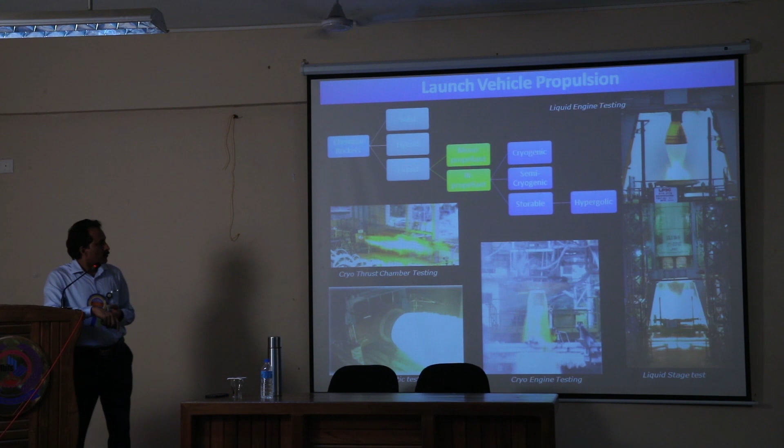So our core area is propulsion. Propulsion is fundamental to a rocket, is it not? If you have to move forward, you have to propel - you are all propelling yourself. So if I have to gain velocity and go to orbit, overcoming the acceleration of the earth, you need propulsion. Propulsion is a technology by which you generate so much energy.

So the fuel used in a rocket is full of energy, and when you burn it, very high temperatures result, something like 2000 to 3000 degrees centigrade. When you expel them at very high velocity, typically Mach 5 and above - 5 times the speed of sound - the rocket gains velocity.

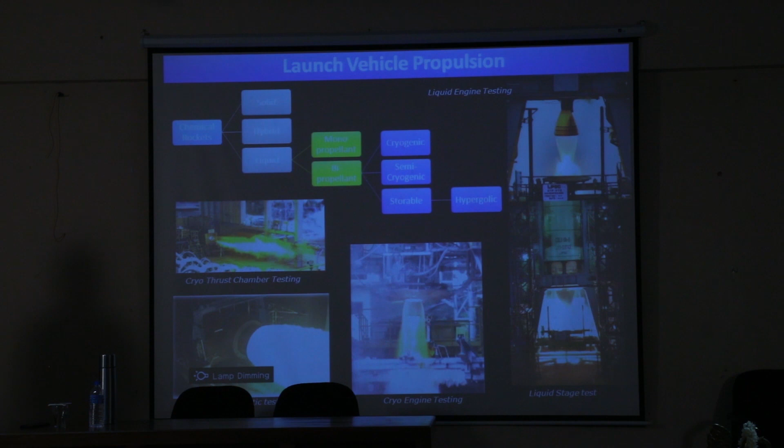And by eating its own mass, the rocket moves forward. So this is a technology. So we have various knowledge like solids. If you look at solid rockets, there are plenty of solid rockets. This is the biggest one we have made, 200 tons of propellant. The grey color, what you see here is a propellant, simply cast into it, 1, 2, 3 pieces, each weighing 100 tons. Even to lift it itself is a massive effort.

And we have the rocket of PSLV, which is 139 tons. We have strap-ons of PSLV, which is 10 tons. This is 9 tons. Like that we have a small 8 gram rocket. So this is not the full spectrum. There are many of these types which we are designing using different propellants and different sizes for different applications.

So this was used in deorbiting of the moon impact probe, which went to the moon. To come back to the moon and impact, this small rocket was used. And there are plenty of other rockets which we are designing. So if you want to design a solid based rocket, it is child's play. In VSSC it will be designed in just 1 month, flat.

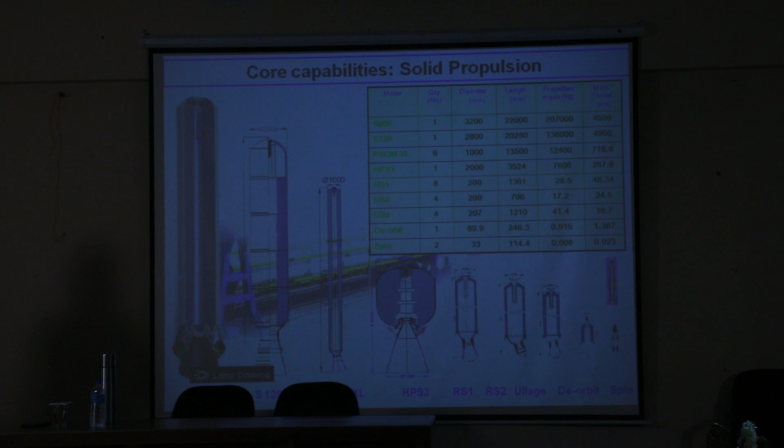But you think that it is so simple today, but I can tell you a story. In the 1960s when we were designing, any motor you test, it used to explode. Kalam and all his friends were designing rockets and motors. Every day they would test, it would explode. So the knowledge that you have today to design in 1 month came out of that experience of explosions and failures, and we understood how it works. So today we know how to design a solid motor just like that. The technology, the software, the processes, the methods are all well developed.

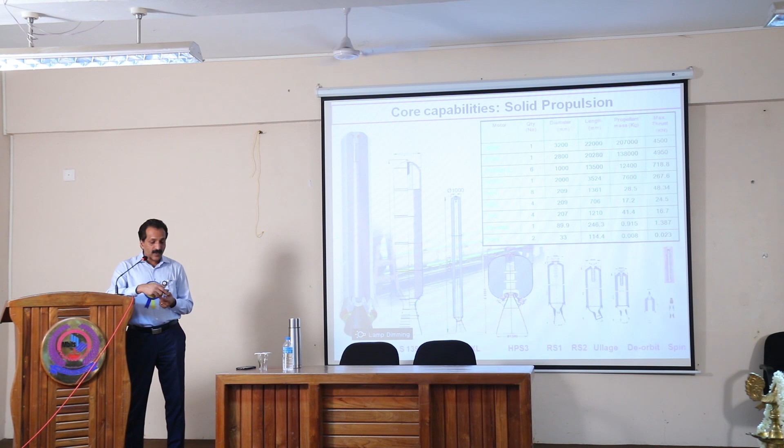So you know 1 megawatt of power? Have you seen a diesel generator which is fitted in the generating stations having 1 megawatt of power? How big it is? It will occupy at least this much size of this podium. That is called a 1 megawatt diesel generator.

And this engine generates 5 megawatts of power in rotating speed because it rotates at 40,000 RPM and operates at 1000 degrees centigrade using gas and pumps oxygen and hydrogen in so fast. And it generates 5 megawatts of power and its mass is only 500 kilograms. So you can understand the power density inside that engine. So that is the complexity of a cryogenic engine.

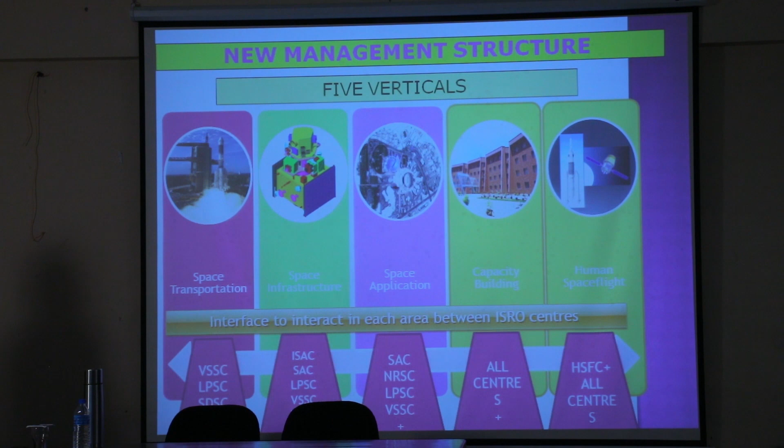Now let me go to how we manage all this. We have a system called verticals. Those who are in the business field would have heard about verticals. So what are your verticals? What do you understand by vertical? It is your domain; you want to divide the total activity into different domains. So we have also divided our domains into various areas.

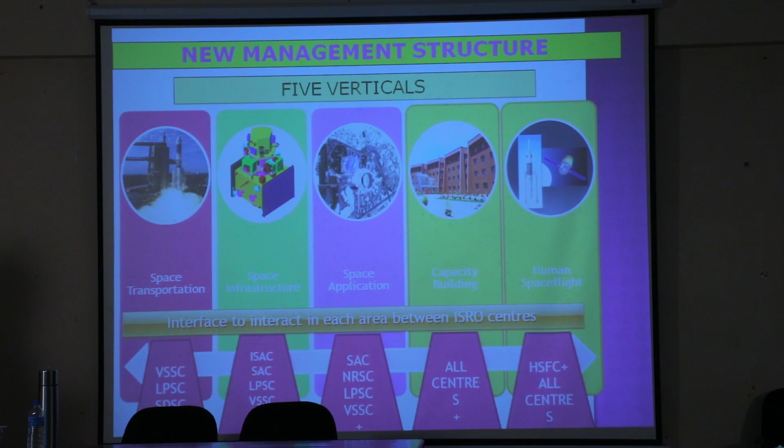One of the areas is called space transportation. Then space infrastructure, that includes satellites and their maintenance and operations. Space application, how to use a satellite to produce certain output. Then capacity building, how to build our institution, how to build capacity to develop new things, etc. And human space flight. So we have different centers.

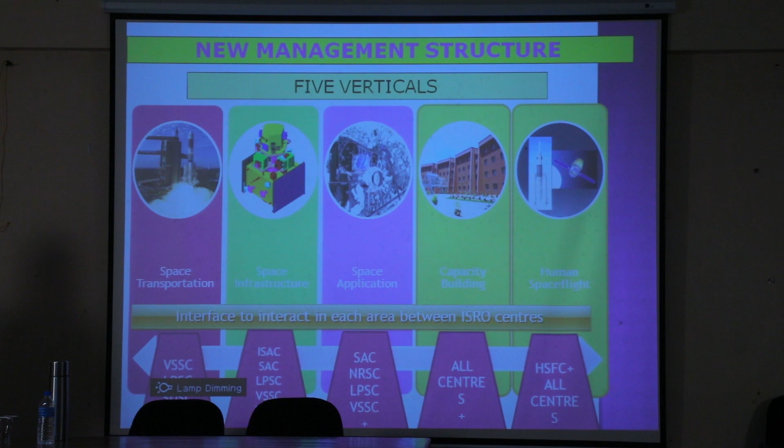For example, space transportation is handled by my center VSSC, LPSC Liquid Propulsion Center, Satish Dhawan Space Center, and ISRO Propulsion Complex. All these 4 centers together manage the space transportation vertical. And I am the managing committee chairman of this whole vertical. So we have a project management council chairman for each vertical. We report to chairman ISRO.

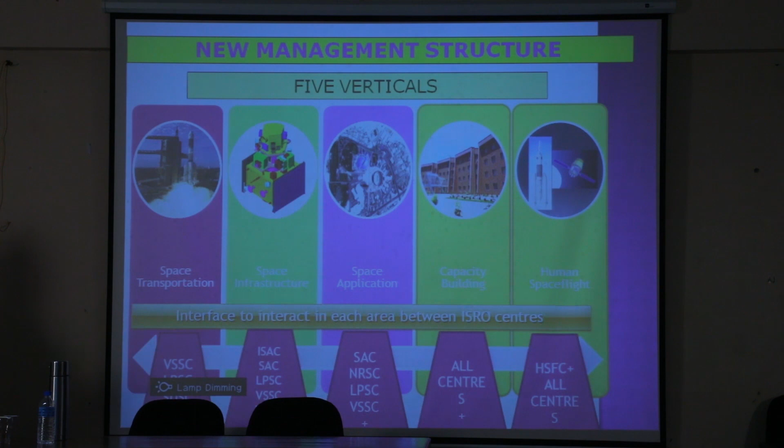So we handle the whole plan of how this has to be done in ISRO. So we created a management structure, and that's how we handle this today. And downline there are so many other structures that we created. There are almost 18,000 people in this organization. If you have to really produce some output, we need to create an organizational structure.

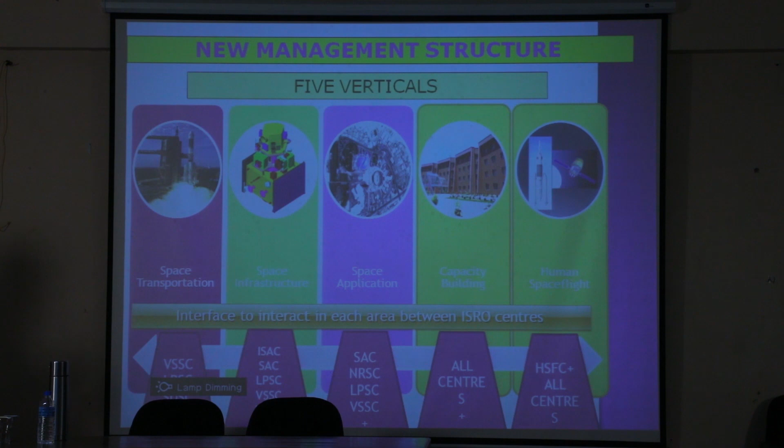So it is important. This is a new concept that we introduced, verticals. But the most important part is projects. You heard of Abdul Kalam, who was the first project director of SLV3 and successfully made it. So this shows the project director of SLV3. He was the project director. Under him there was a deputy project director, and under him there were project engineers, and each of them did the developmental task. So we create a structure in the organization.

Suppose we have to make a rocket, we immediately go and make a project team. So you are the leader, and he is the deputy leader, and these are the sub leaders, and each one is responsible for this. If you have to conduct a conference here, how will you conduct a conference? Immediately you will form a committee to conduct a conference, and you will form a local organizing committee chairman, and under him there will be a chairman for catering, another for transportation, another for technical program, right?

So this is essential. If you are to organize today, if you are to run a system, you need to first delineate the responsibilities, and there must be somebody who is actually coordinating and seeing where the weakness is, put the people appropriately, and then manage it. It is the essential part of any management process. It cannot be just like in a chaotic environment, nothing will come out. So in an organized way, you have to find somebody who is capable of managing each of these, somebody who is good in food arrangement. A foodie fellow will not be good in transport arrangement. So you have to identify the right person to do the right job.

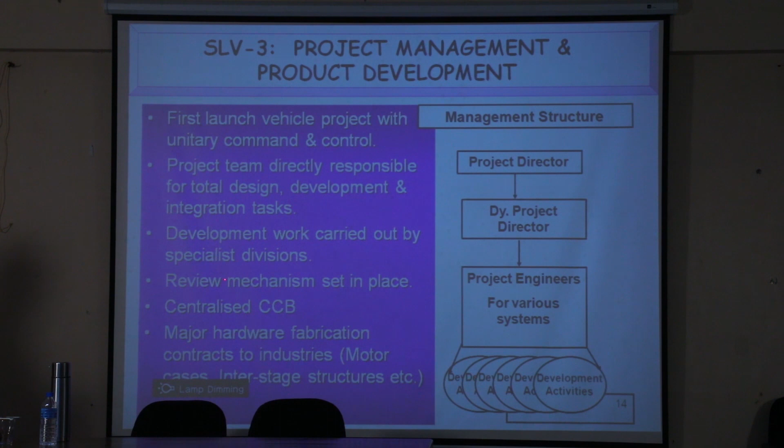Engineers' responsibility is equally like this. You will ultimately end up managing a lot of things in your career. So you need to understand how to manage people, how to manage situations, how to manage resources, how to manage time. This is your essential work. So what I am telling here is that we created at that time a project director who was responsible for the first launch vehicle, and all of these people were reporting to him, and Kalam is the person who actually created a concept called review.

In ISRO, before that there was nothing called review. Somebody will design, he will make it, fabricate it, test it and fail. Now, we said that it cannot be done. You are using public money, so whatever you design, you bring it to us. A team will sit, will listen to him, whether his approach is correct, whether his design can be given a go ahead. So we started creating what is called the peer review principle.

Suppose a work done by one of you, you allow that to be reviewed by somebody else of your level, not your teachers. You know what will happen? They will ask you questions. And when they ask you questions, it will make you think. And when it makes you think, you will understand your fallacies, and you can correct and improve. So this is a simple principle: when you subject yourself to review, you are actually improving yourself, not being questioned.

So this is a culture of ISRO today. Whatever you do, you subject it to review. You open it to people, telling them I am doing this, I am doing this. Okay, you give your comments, and people give comments, and based on the comments you become stronger, you become better, and it is most likely to succeed when generally there is an agreement that what you are doing is right. Everybody need not agree, somebody will be differing, but then the project leader will come and say, I agree with the general view, go ahead, right?

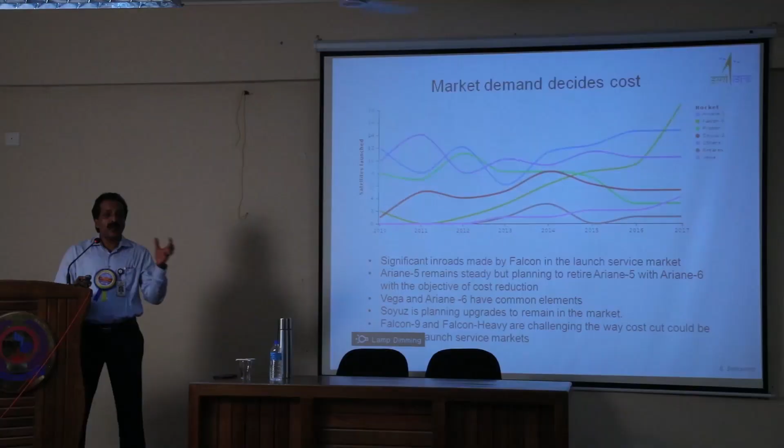He has dedicated almost 30% of his wealth to building rockets, and he is launching one of the biggest rockets. So Elon Musk is a person who is building a rocket to go to Mars using the money he made using PayPal. PayPal was a financial transaction site which he designed and he sold off. Now he is fully into aerospace.

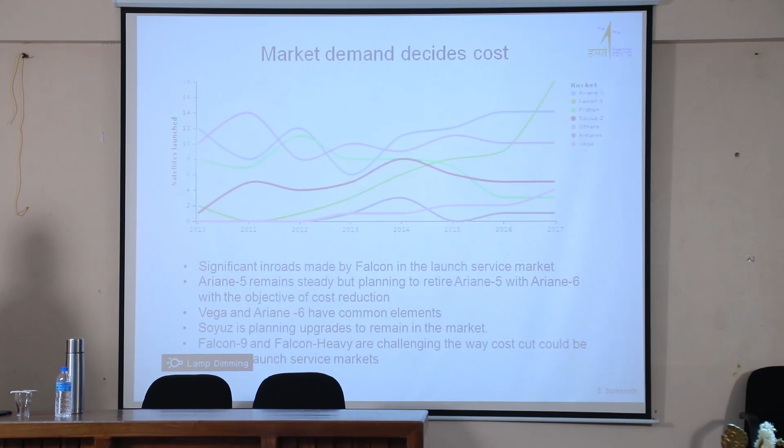So now it shows Falcon is making one of the biggest strides in the history of rocketry in private enterprise. Today in America, the entire rocket business is handled not by NASA. NASA is dead. The entire space in the US is handled by two big companies called SpaceX and Blue Origin. They are all full of retired NASA people, but they are making the change and deciding where America should go in the future.

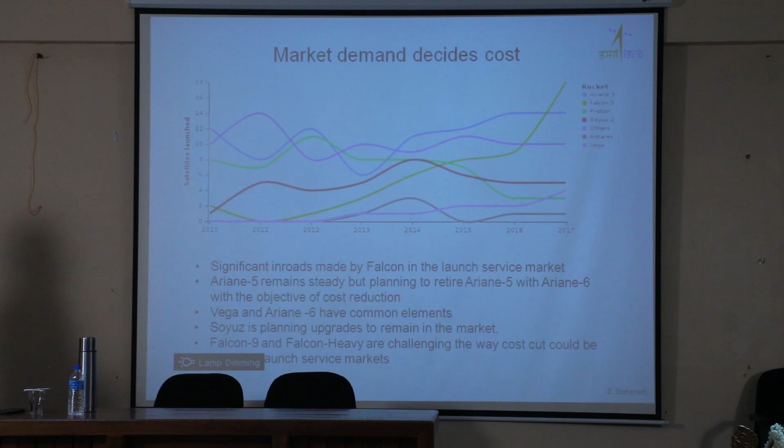And many others like Soyuz, Ariane, etc., they don't know what to do today because the private players are changing the way the market works. So this is something which I want to tell you. So those who are interested, please read.

Cost is an important thing for everything. So the cost of launching is typically 50 to 70% of any mission. Mission means why I am launching a satellite. I have to do communication. I want to do television broadcasting. For that I am making a satellite and I am going to launch. So I should get revenue from the television broadcasting.

So every channel will give me 5 crore per year and I am selling it to some 100 TV channels. So I get 500 crore per year for the next 10 years. So I make 5,000 crores. I have to invest and make a satellite with 1,000 crores, another 1,000 crores for launch. So I have 3,000 crores balance in my pocket. Good economics, right?

So if I have to do all this, I must compute my investment and return on investment, and what can happen at launch, the insurance. Suppose the launch fails, 1,000 crore is gone. So how do you invest, insure? All this becomes important issues in space. You are not simply launching rockets, you are looking at various aspects of cost. So you should understand what things are involved, how you really cost the launch, the satellite, and the transponder.

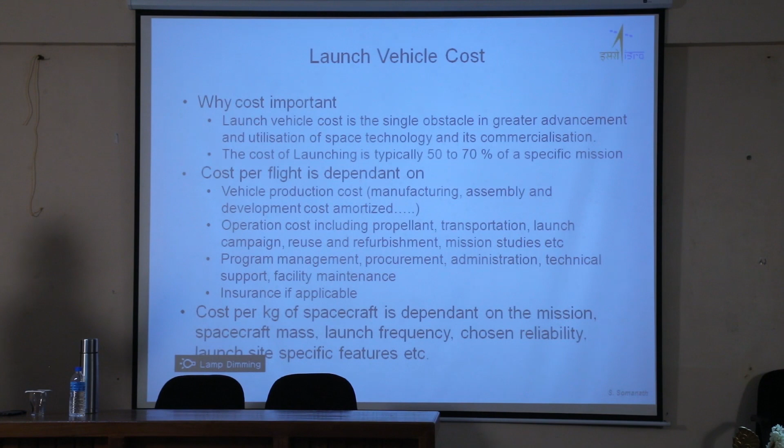Suppose Asianet wants to uplink a news program all across the world. Any idea how much money he spends? You engineers need to know, electronics people. A television channel starting in Cochin tomorrow, to start a channel, uplink its program and make it available to all India, all Kerala viewers, how much money do I need to spend? Very difficult question, no? But then find out some way.

You are all going to become engineers, you are going to manage such organizations tomorrow. You are going to understand how it is all managed. So you should understand there is a process of leasing transponders, how much money you have to pay yearly for transponder leasing. All these are technologies.

Suppose you want to run a BSNL telephone network, and they are giving a data rate of 1 GB per month. What is involved in this? How is Jio able to do it at low cost compared to BSNL? Anybody thought about it? You are using your mobile phones just like that, no, Jio? Please ask this question. Okay, so here again the same question comes, how launch cost can be reduced. So let me describe quickly some of the important elements.

So every launch cost is a function of various aspects. One is its mass, orbit, etc. And customers are important. For example, if ISRO goes to Arianespace to launch, Ariane will give ISRO a special price. And it will not give that price to Pakistan, or it may not give that price to China. Because we are a loyal customer, we have been coming regularly for launch, so they will give a preferred cost to us. And there are special requests, market pressures. Suppose their launches are coming down, they may give low cost to us.

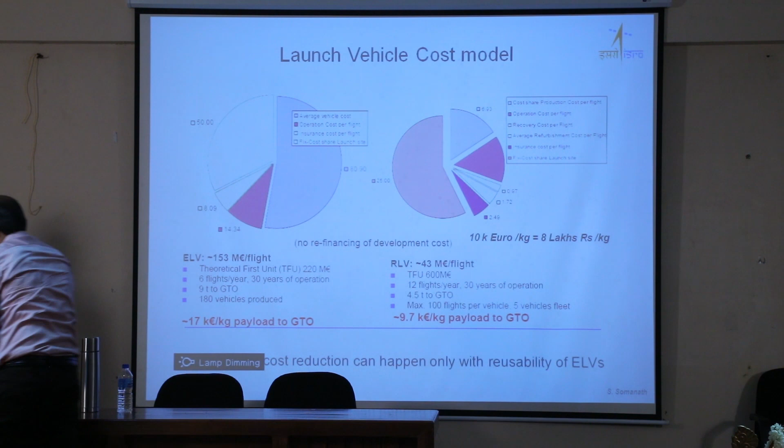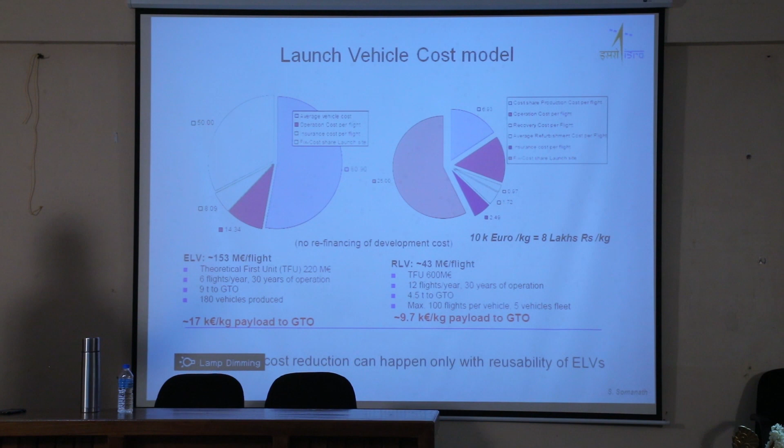So you have to compute what is the density of the aluminium, find out the cost of aluminium per kg, and if you go and ask in a shop to buy that much aluminium, nobody will give you. They will give a little bigger. So you have to buy. So what is the allowance that you will give? What is the machining cost per hour in a milling machine? How much is the machining cost per hour in a turning lathe? What is the cost per centimeter square of anodizing? What is the drilling cost per hole? Any idea you have?

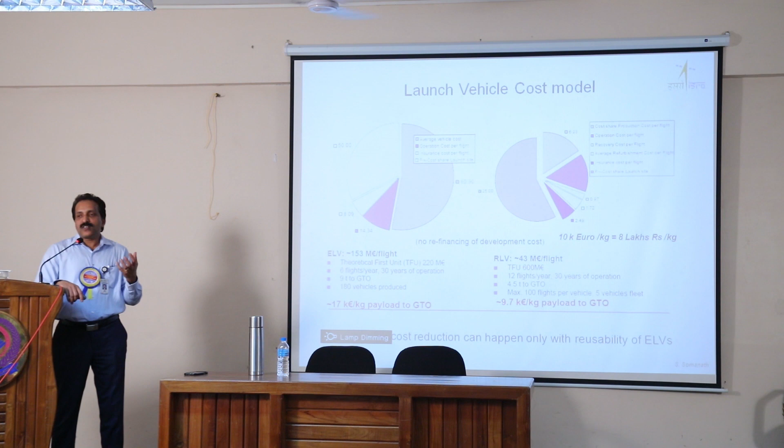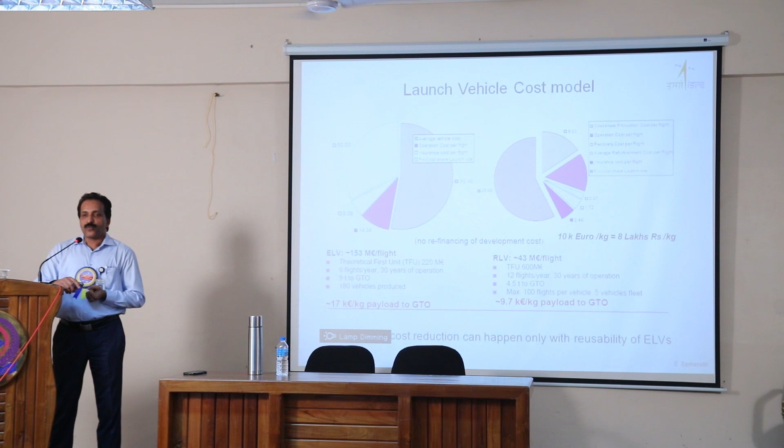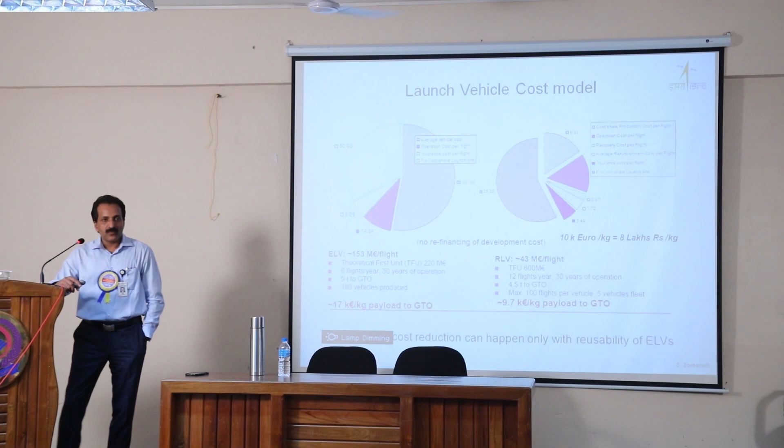So how to cost this is a lesson that you need to learn in actual engineering. So you must know how to create cost models of anything that you are going to work on. So if you want to start a startup tomorrow, you are going to make a software and sell it. One app you are going to develop and sell. You have to find out the cost of the business. How will you do it? How many engineers do you have to engage? How many hours of work do you need to develop the software? How much testing time will it take?

Very important. So start learning business economics from today. If you are not reading newspapers, Economic Times, take it and read. Your life depends on it, not on the engineering which you study here, but on your ability to apply your engineering to real life problems. Otherwise you will face the problem which I faced when I joined ISRO the first time. It was impossible for me to make the estimate, and I calculated some lakhs for it, but it turned out to be twice that in reality. So this is an error that you can make if you are not trained enough.

As an engineer, you should always worry about how to reduce cost through process improvement. You know, is the cost of cars increasing or decreasing? Cost of cars? What is your idea? One answer please. Increasing, you raise your hand. Cost of cars are increasing. Decreasing? Okay, no opinion also, there are plenty. So it doesn't matter. But the general feeling today is car cost is actually decreasing.

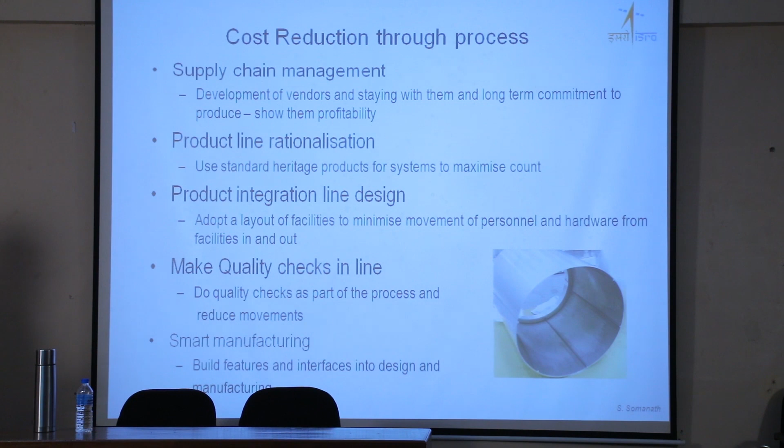Reusability is one of the important issues that rocket people are facing. Unlike aircraft, we are not reusing rockets. We use them only once. We build such a complex machine, it puts one satellite, and the entire thing falls in the sea. Whereas an aircraft, you take it for hundreds of flights. So it is economical, and we are able to travel in an aircraft because it is reused. And the day rockets become reusable, we should be able to travel in a rocket to the moon and come back. So we are waiting for such a thing to happen.

Today, the possibility of reuse in rockets has been shown by SpaceX. Have you seen their reusable rocket, any time in a video? Not seen? Please go and see. So this is the Merlin engine which SpaceX builds, and this is the engine Blue Origin, the Amazon owner's company, is building. And the new engine of SpaceX which will take you to Mars.

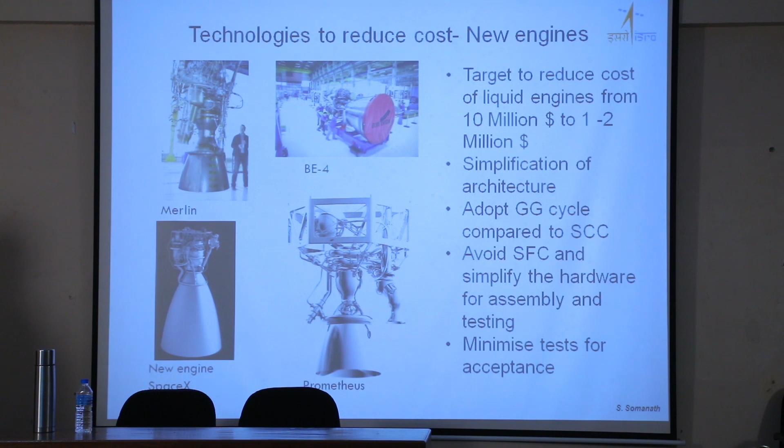So they are working on new engines today, and they are bringing the cost down from 10 million to 1 million. Earlier these engines used to cost 10 million per piece. Now it is only 1 million. They are able to produce such engines. That means every day they are finding technologies, materials, manufacturing processes to bring down the cost. That is a challenge in the engineering area.

So another technique of reducing cost is to reduce the number of parts. When you integrate various parts into a single item, your cost comes down. That's why molded chairs are cheaper than assembled chairs, because it is a single-part product. If you make it out of multiple parts, you have the cost of assembly, nuts, bolts, different dies, and process time increases.

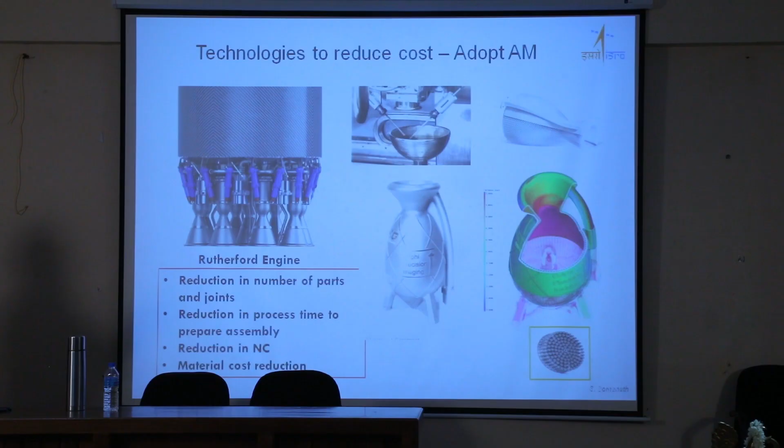Another important manufacturing technique which has come today is called additive manufacturing, 3D printing. Heard of this word? Okay, 3D printing is a process in which the material is deposited in various ways. It can be powder, laser-induced molten metal, different layer forming, e-beam melting. There are so many technologies coming. Maybe some of you should take a seminar course in additive manufacturing. Plenty of literature is available, and this is going to change the world in the next 10 years.

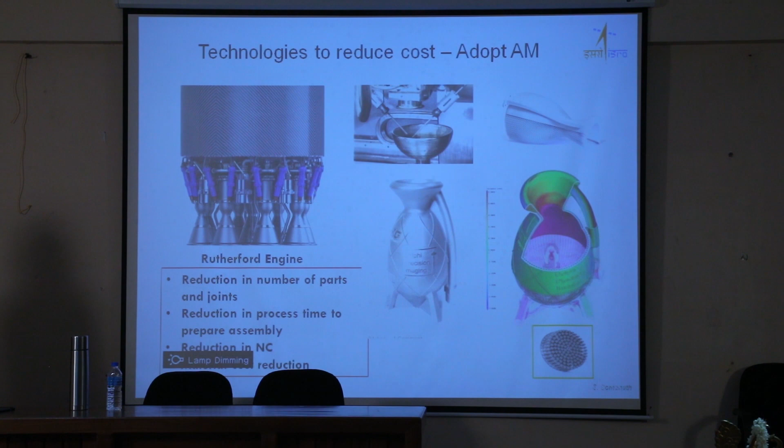All the items that you are going to handle in future in your home, your office, your engineering will be additively manufactured. Your dress will be manufactured additively. No longer will stitching be done in any shop. Your dress will be printed from material with no stitching. Your shoes will be additively manufactured based on the custom design of your leg. You put it inside a scanning machine, it scans your leg, and through the other end a printed shoe based on the design you selected on the screen will come out. It is not far away.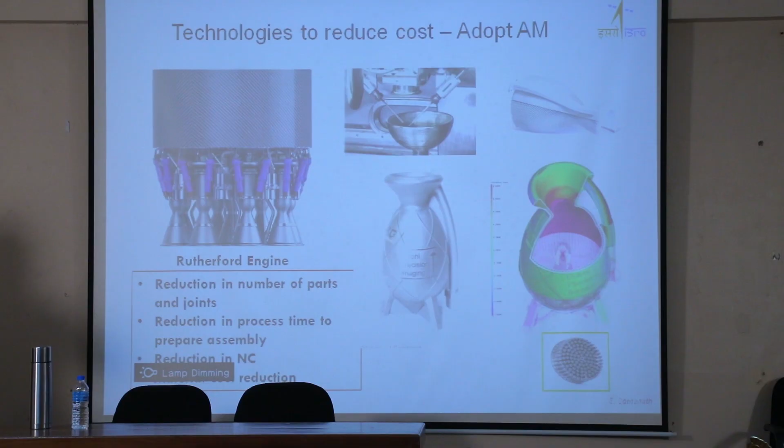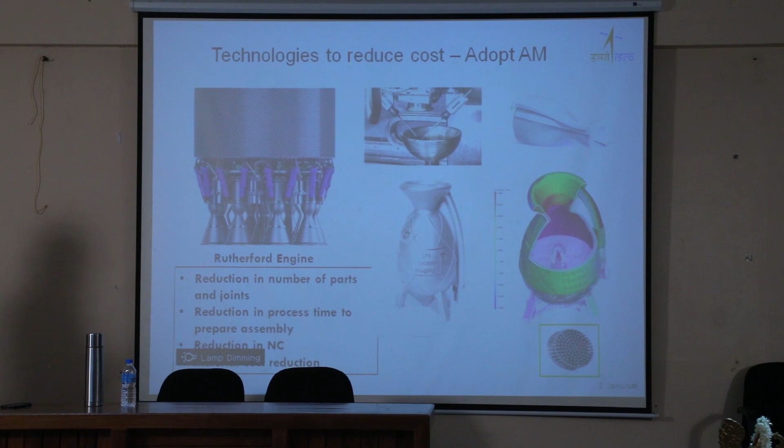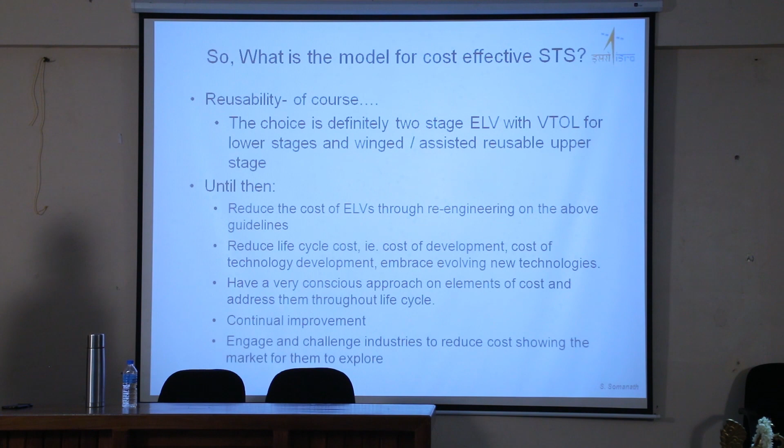Your food, your burger you order in McDonald's will be printed and supplied to you in the layers you wanted in sequence. You can put ham or cheese or whatever layer you want, and it will print and give you the burger. Your heart will be printed using cells extracted from your own body, replacing your organs, bones and devices. Anything can be printed. So this technology is slowly making inroads into the way we look at manufacturing. All the machines you are using, milling machines, lathes, will vanish. Everything will be only 3D printing machines. Please watch for the day.

So reusability I already described. Let me talk about some new developments and our strengths. I told you it takes about 12 years to develop rockets in ISRO. We wanted to change this because the world is changing. Cost is coming down, time is coming down, so we thought we would design a rocket in 1.5 years. So we designed a rocket called SSLV, Small Satellite Launch Vehicle. This is a 4-stage rocket. It is twice the size of SLV-3 of Kalam's era, and we completed the design in 6 months.

And we have manufactured it; I am just seeing on my WhatsApp the first picture of the manufactured motor case, in less than a year. And in 1.5 to 2 years, we are going to launch it. Can you imagine that from 10 years we were able to find engineering solutions to do this in just 2 years? That's a great achievement for a government organization like us that wants to compete with the world and private industries in the launch market.

So we are also doing various new things. This is SSLV I just described. We are also trying to do a vertical landing of a stage like the Falcon does, and we are also making a heavy lift launch vehicle which will take almost 10 ton to satellite orbit. That is under design now.

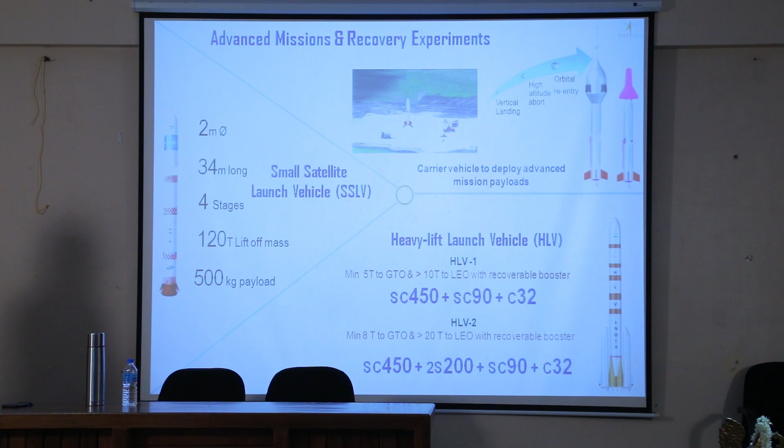This is SSLV, which is what I already described, which is using all new cost reduction techniques. This rocket costs only 30 crores. The PSLV cost today is 230 crores. One PSLV costs 230 crores and this SSLV costs 30 crores. So you can understand the cost reduction we have brought in through choice of material, manufacturing process, and complex system simplification. This is the challenge of an engineer.

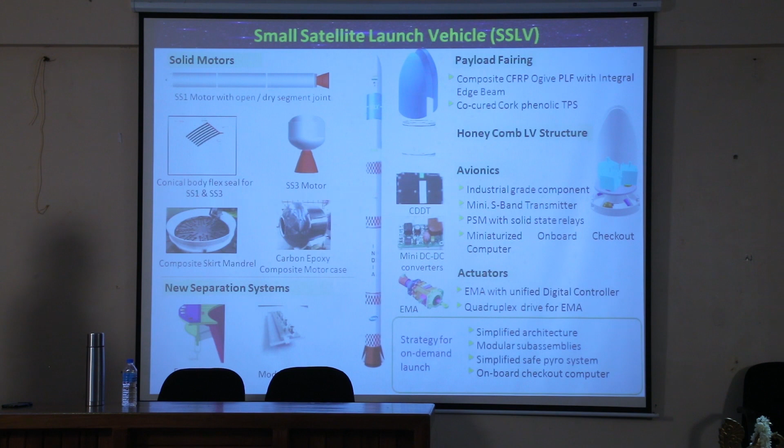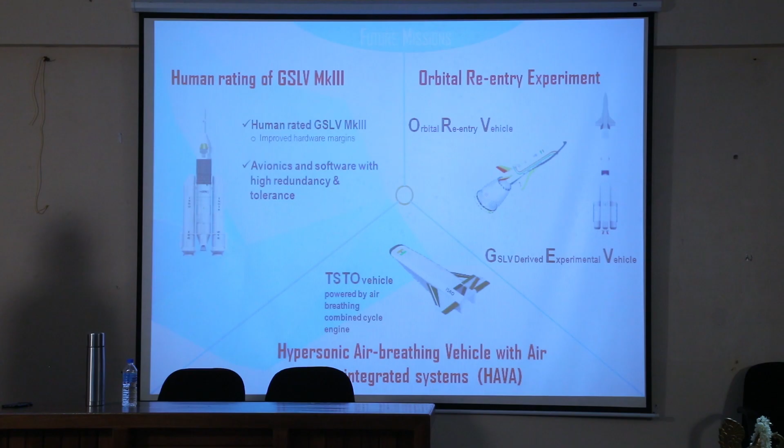And we are going to work on a very interesting area called human space flight. We are going to carry human beings to space and bring them back safely, of course. This requires a lot of complex work on making a rocket which is human rated, and making software and hardware which is failure tolerant. Suppose anything fails, it understands it has failed, it will reconfigure. Suppose a computer fails on board, it will switch that computer off and switch on the next computer and work automatically. If a control system fails, it will detect the failure and take alternate algorithms. If nothing is going to work, it will ask the crew to escape to the safe route, to escape and parachute out. Everything autonomously. So the software we put in the rocket will be fail-safe software.

And we are going to develop a two-stage to orbit vehicle based on air-breathing engines. We have already tested this, and we are going to fly a winged craft that goes to orbit, stays there for about a month doing experiments, then comes back and lands on an aircraft-like landing strip. Two months later, in July or August, we are doing the first mission of its landing experiment at Karnataka, at a Defense Air Force base.

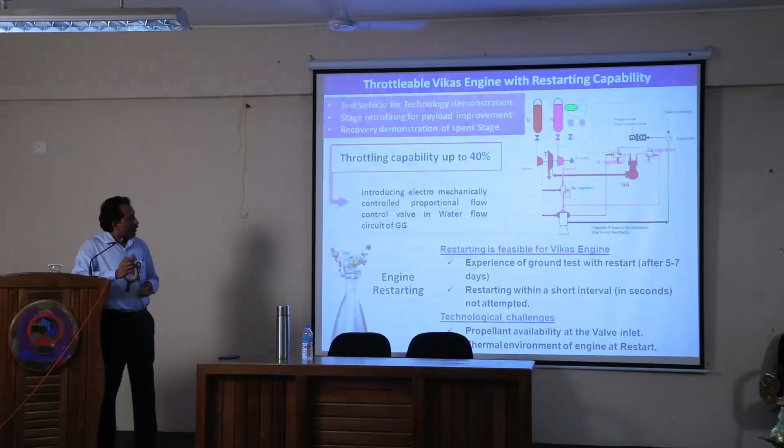We are also getting ready to do this landing experiment. And we are developing very complex engines today, engines which can be throttled. Suppose you have to come down and land, the current engines are not capable of that. We have to reduce the thrust progressively so it slowly comes down and lands. So we need engines which can be throttled, and we are also making engines which can restart. These two capabilities we currently don't have, and we identified them as very essential for making future rockets.

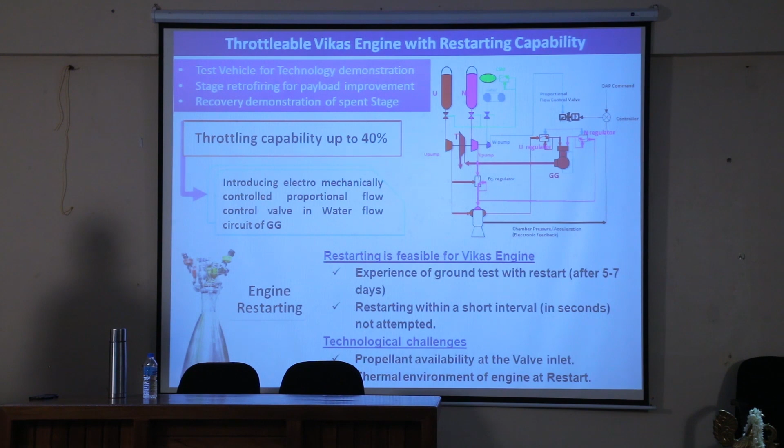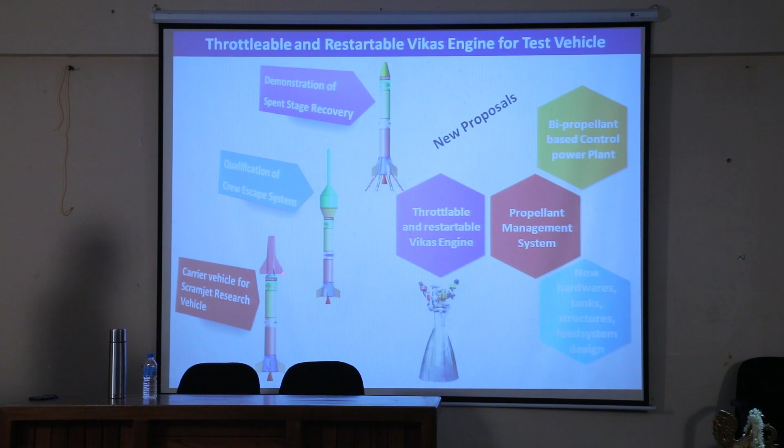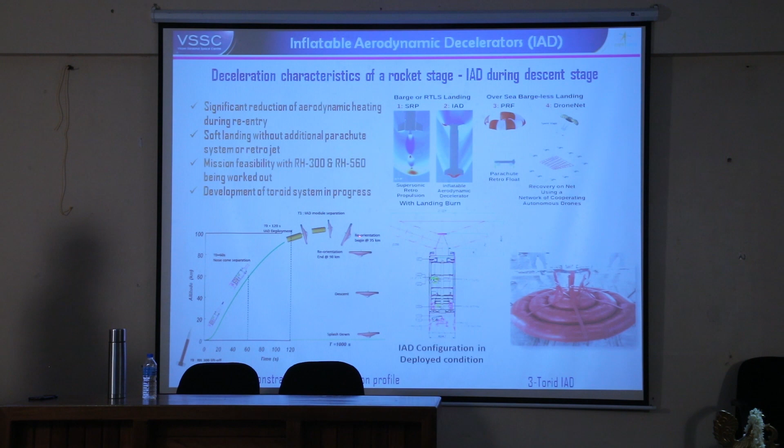We are also trying to use balloons as landing platforms. After reaching orbit, this balloon will expand as a decelerating wing and come through the air and land softly, and then we can recover the experiment. This is one model we have realized. We are going to make a launch, a very difficult thing to understand and study and make work. This novel idea is called an aerodynamic decelerator. We are going to test something like that instead of a parachute.

So currently the design is getting ready. We hope to launch in another one year. We are working on hybrids.

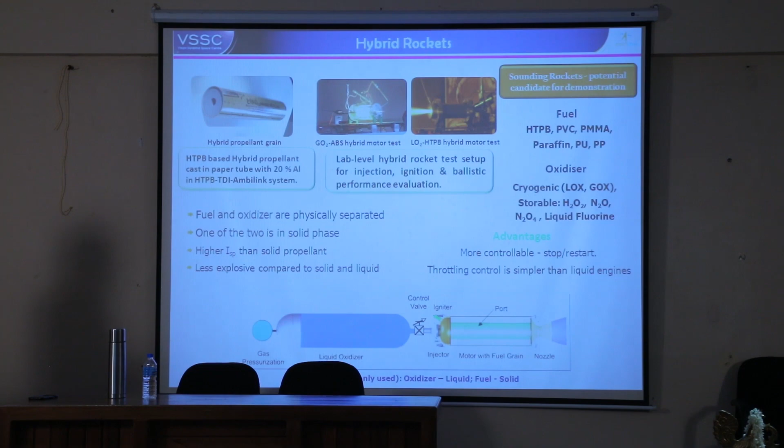I don't know whether you have heard about hybrids. Solid rocket you have heard, liquids you have heard. But solid rocket's problem is if you ignite it, it will have to fire forever and doesn't shut down. So hybrid rocket is one where the oxygen is kept separately, and I can inject the oxygen into the solid and it will fire, and if you want to switch off, I simply close this valve. So a hybrid rocket fires like a starting and restarting type of engine, so it has a lot of mission flexibility.

So we have just tested one sample now, and we are going to develop a new rocket like this.

So let me share my final areas with my experience that we have learned from mistakes. This is important for all engineers. In ISRO, we have a culture.

If you make a foolish thing, or if you make a failure, or if you cause an error, we analyze it. We call it failure analysis. So I have a committee in VSSC called Failure Analysis Committee. Have you heard of such committees? It is a very important committee in which multidisciplinary people will sit, they will analyze the failure, find out the basic reason why it failed, and take the corrective action. So it's a multidisciplinary problem, not a chemical problem, not an electronics problem, or a mechanical problem. It is a problem which has to be solved by people who have domain experts in various disciplines.

So I will show you one example of such problems.

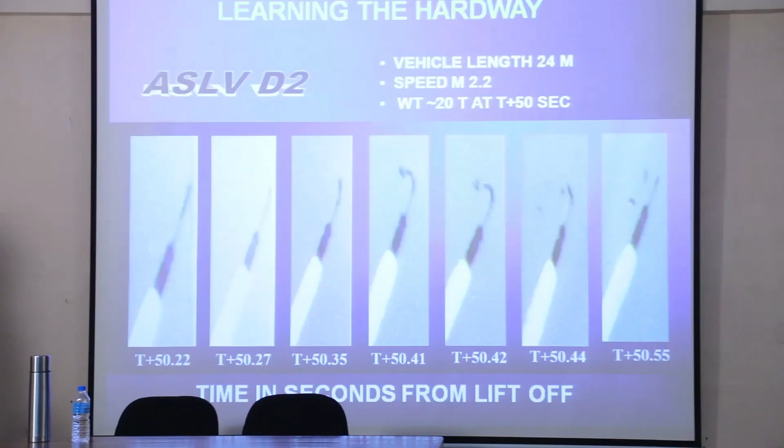You know about ASLV, probably you know. But this you wouldn't have seen. This picture is from ASLV failure. It showed ASLV's second flight, it goes, it bends and breaks down like this. Fortunately, we were able to get photographs at that time. You can see the timing is from 50 seconds to 50.55 seconds. Not even one second. This much has happened in less than one second. But we were able to get this many photos and we understood why it failed, and we analyzed and found out what went wrong in this.

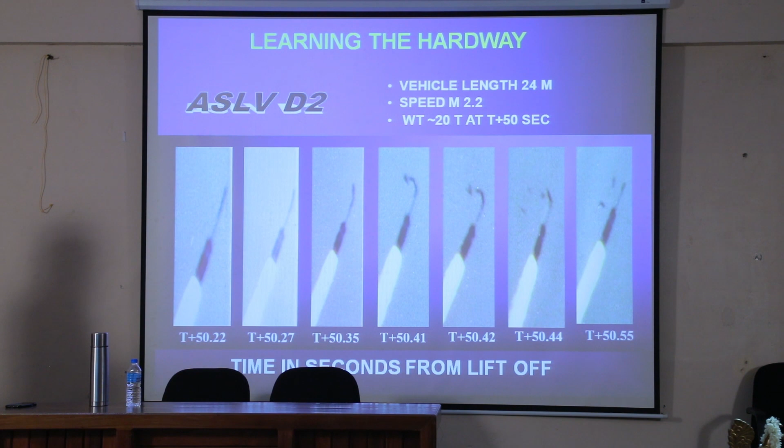And that has made PSLV successful. It is a very complex learning that we understood. It is because aerodynamics and control interaction takes place here, and careful analysis of the data showed that.

So this I will skip. And here again I will show you another problem.

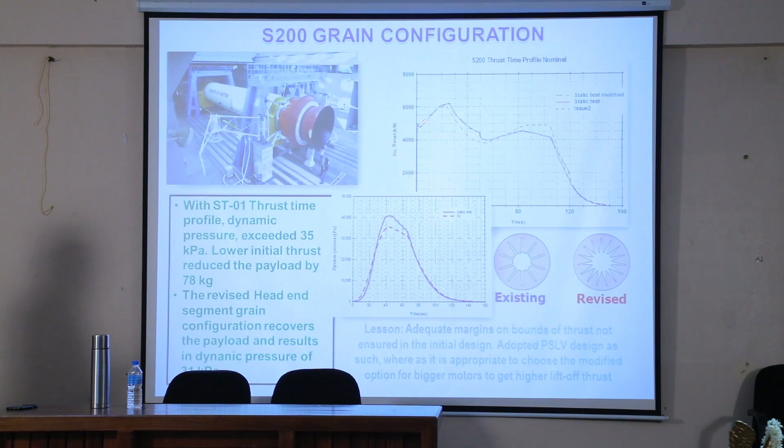See, this is a thrust time curve of a solid motor. Thrust time curve means how much thrust is produced at any given time. If you can see here, when such a rocket flies, the air pressure will be this much. But if I modify it like this, the air pressure will come down to this much. So when you do that, my rocket will be lighter. After designing it, we found it was this much, so our rocket hardware was likely to fail. So what we did is immediately change the design like this, and the thrust time curve reduced and increased later, when the atmosphere is not there. So it produced a rocket which is more efficient.

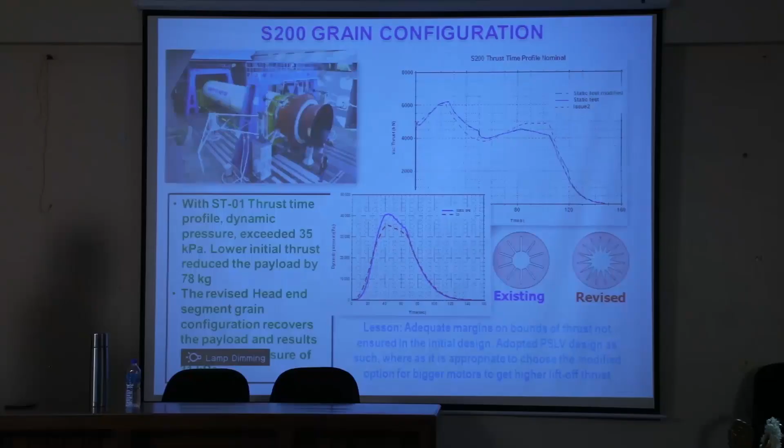Very simple principle. Maybe you won't follow this right now, so I will skip some of them.

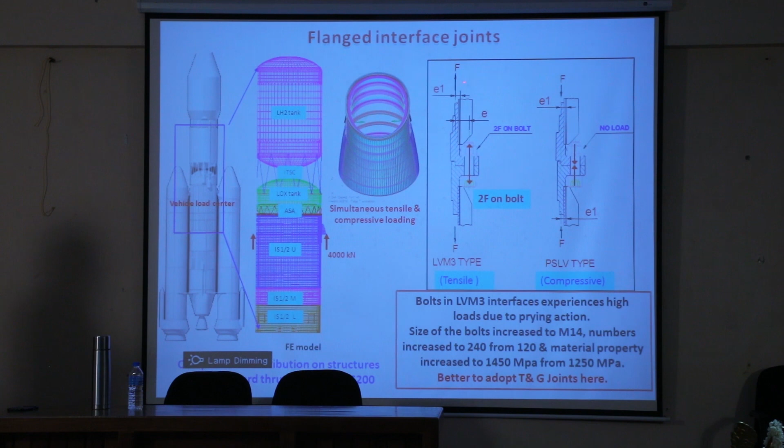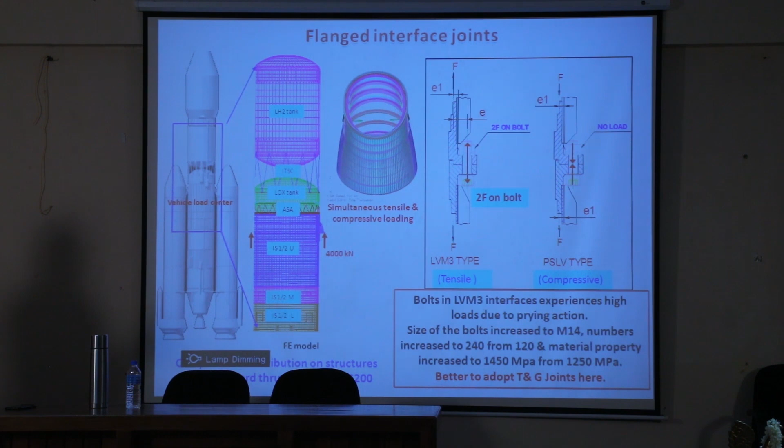Another interesting problem we solved is when we were designing this GSLV Mark III, we found the bolts here were designed in such a way in PSLV long back, but that principle cannot be applied here. We found in PSLV all the loads were compressive like this, F was always acting like this. But the moment forces act like this, bolt load capacity has to be doubled, because the force amplifies to 2F on each bolt, whereas in this condition F equals F here. When you apply force F and F, due to this eccentricity, the load multiplies by two. So this was not understood and all our design had to be scrapped and made new after some level of understanding. A very simple mistake, simply because I already knew how to design PSLV, I applied it on GSLV Mark III, and it caused a problem.

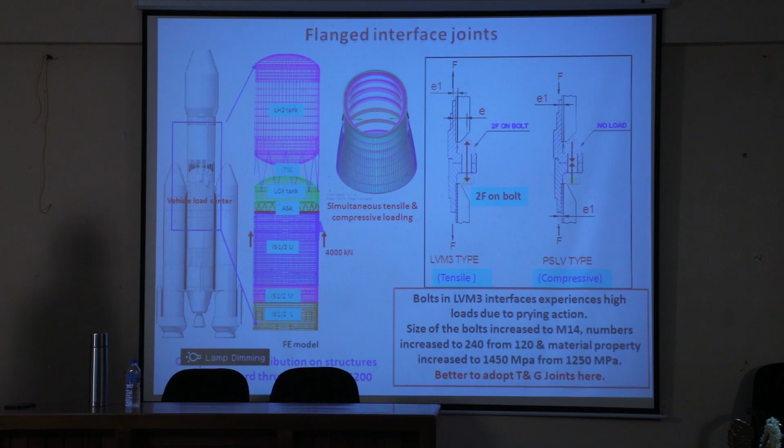So knowing too much is also a problem, I think you have to understand. These are something which is very strategic, so I will skip. So this is about how to design a shape here.

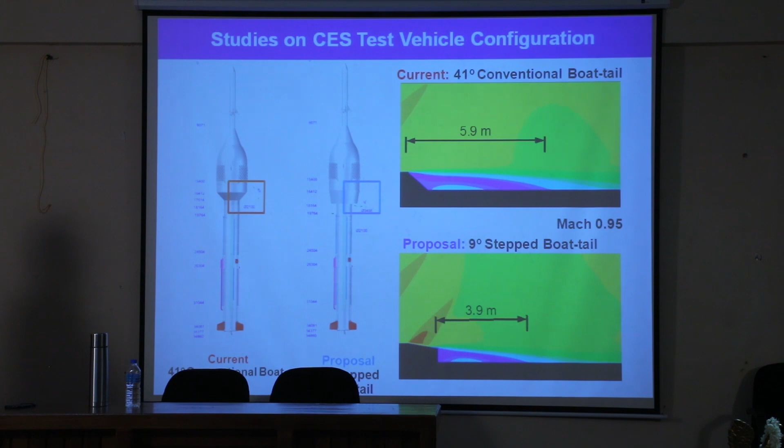See, this is one of the rockets I showed which is newly designed. We found that if you make a shape like this, it will create flow oscillations. The air which is flowing through that will create such a vacuum here, and it will oscillate and create problems. So we suggested it should be a boat tail, so that this volume is reduced and can be modified. This is one of the studies we did to understand how small things can cause problems.

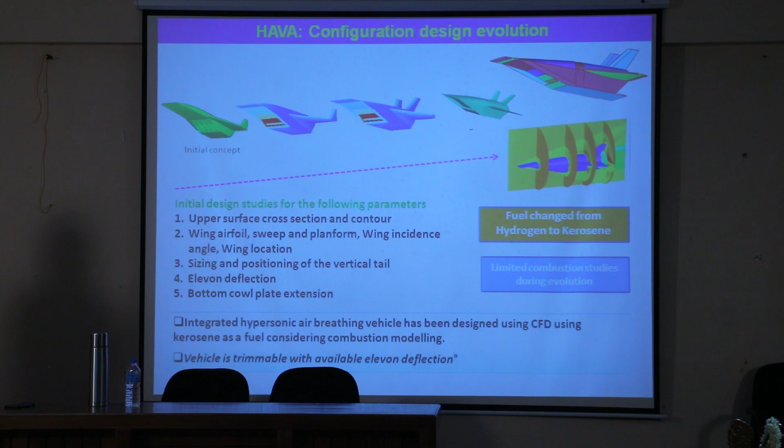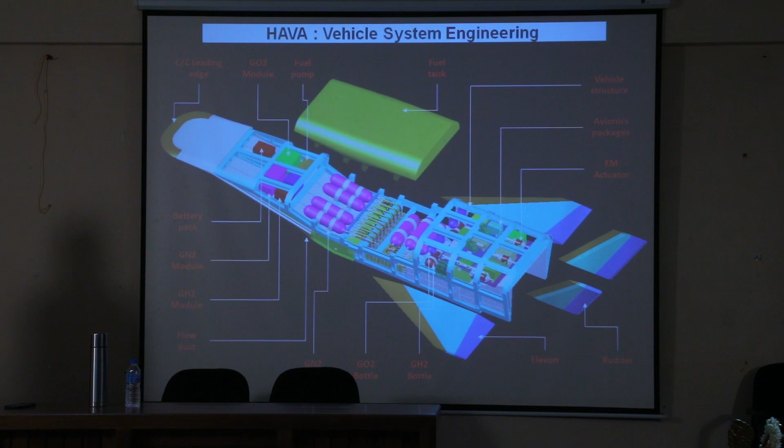Another interesting thing is looking like a shark - this is the air breathing engine. This was the original concept, but today it looks like this. Over the years this shape has continuously changed through iterative analysis. We have a lot of software with us which studies what all things can change, and then we make continuous changes to create very complex machines like this. This is going to be our final air breathing engine. This is a fuel tank, these are the gas tanks and the engine feeds, and inside there will be the engine, control system, wings, air intake, etc. All this very complex design is already made and we are currently under fabrication.

Can you just click that video? Put up.

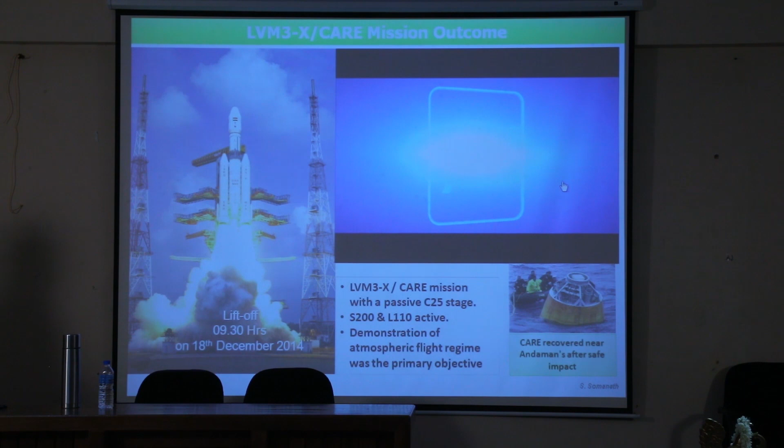I was the project director of this rocket. This was developed in the 2002 to 2014 time frame. This was my first flight in December 2014, which actually sent the first human capsule to a suborbital flight, and we recovered it in the sea almost 1,500 kilometers away from our launch station. This was such a successful flight where we designed and developed this rocket to its fullest extent, and later two more of these flights have happened, and now it is declared as an operational launcher which is going to launch our satellites.

So this shows the next flight of it, which shows a pad abort test.

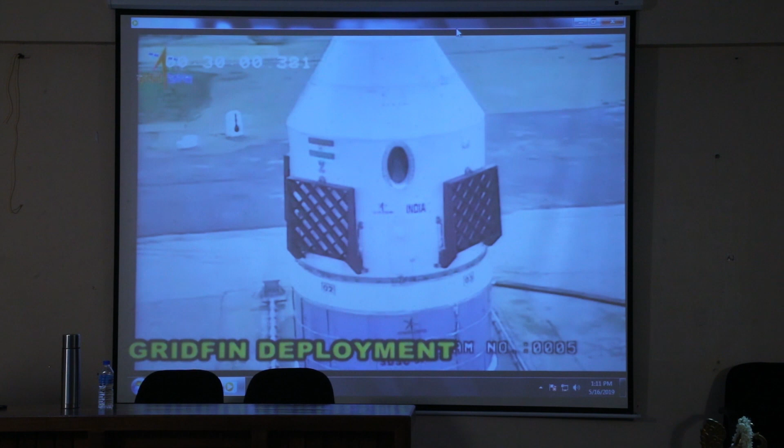You can see this, how it fires.

So this is the flight of a crew escape system. In case the human beings are put inside and it causes a problem, it can escape like this. It will immediately fire and take the crew 2 kilometers away from the launch vehicle which is about to explode. So it shows the parachute expanding and the crew module falling down with the parachute. You can see the bigger parachute coming out. Each parachute is 30 meters in diameter - you can see 30 meters is almost this much length, diameter is the size of these parachutes, and the weight of the craft is almost 4.5 tons. So it carries 4.5 tons and it impacts in the sea so softly.

So this design is the one which is actually going to take human beings to space. This is one of the very innovative tests that we did in recent times, and we are going to make the next one for the actual human being that is going to fly. It is still bigger in size than what we launched last time, so it looks like a very complex design. What you saw firing is these motors with the reverse nozzles, and this is a place where the crew will be sitting, and this is a door through which he will enter. So you can see this is the area where they are going to be accommodated - it's as big as a big room where three astronauts can stay and then go to orbit.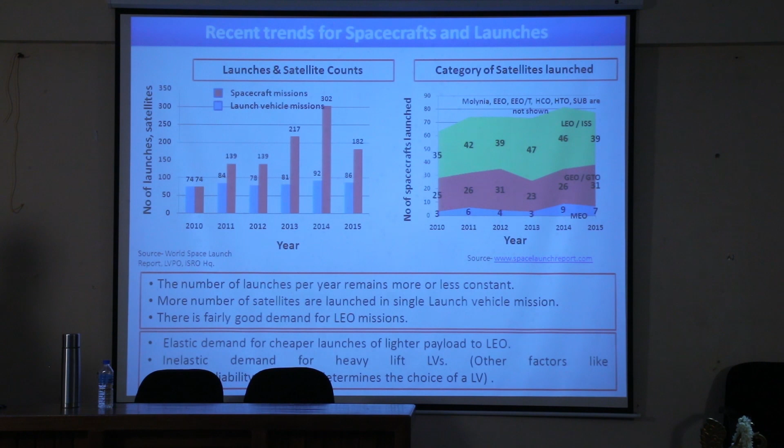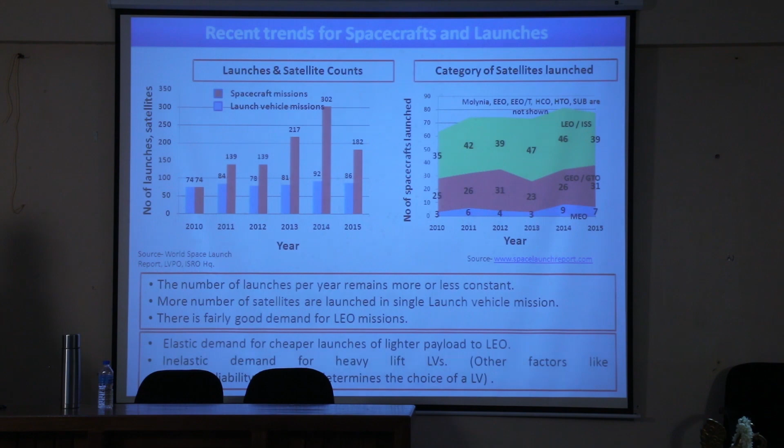So in the future, we are going to look at economics, because ISRO cannot remain just like an organization which launches some interesting idea - we have to make money. We have to be an economically profit-making industry. We have to serve the nation in terms of the number of transponders and satellites. We have to meet the defense requirements. Last year we were given almost 20,000 crores of money from the government to build all this, because our defense satellites, our servicing installations, our communication networks, our television networks, our imaging requirements are so huge today, and also the human spaceflight requirements require a lot of money. So this organization is now sufficiently supported by the government to handle all these complex engineering problems.

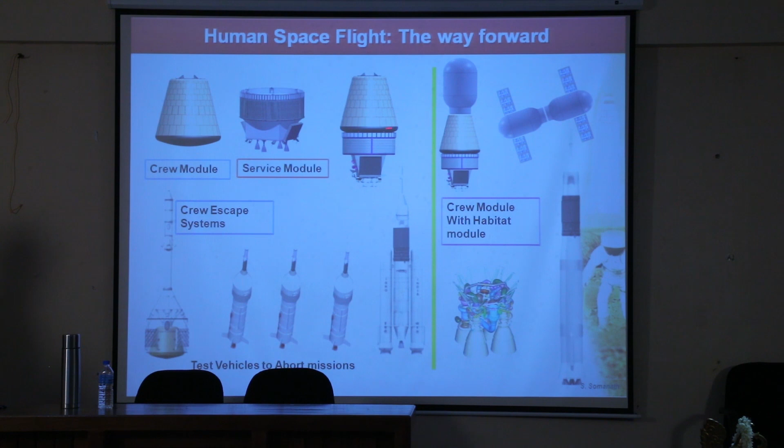And we are going to develop bigger rockets now. This semi-cryogenic engine is under design - this is a new engine which is going to develop 200 tons of thrust. And when you put it in the rocket, we are going to increase the payload capability by almost 6 tons. And we are now currently progressing in designing a new rocket which will have 10 ton to GTO capacity. We call it HLV, Heavy Lift Launch Vehicle. And this is how the human capsule will look like - this is a human capsule, this is a service module which will get attached and will get detached when it is returning. And later we will be putting some capsules where people can stay in orbit for a longer time.

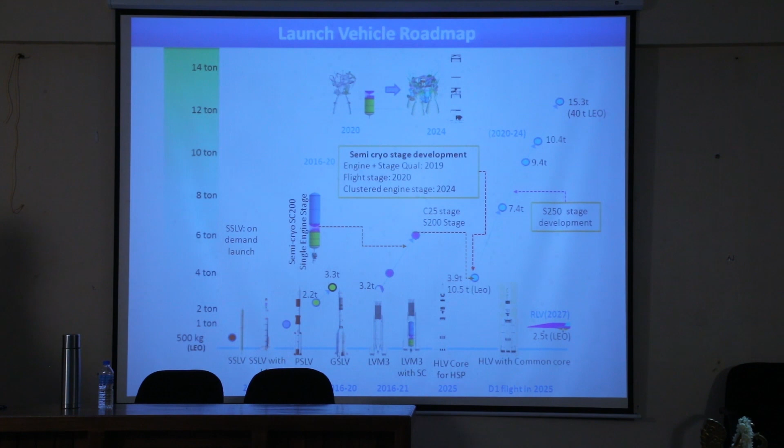So what I wanted to tell you is a set of programs that we have envisioned in ISRO over the years, and we have set a system in place which includes technologies and management of resources very well. And at least for the next 30 years, a long-term perspective of the planning of the organization is already done using our own people.

And I want you to be aware of this part, that ISRO is not a place where some special people are coming from everywhere in the world and then working. People like you, because I am also a student of a regular college. I got educated in a Malayalam medium school and had an opportunity to go to engineering college at a time when it was very difficult, because the entrance test was not there at that time. Because of that I went to an engineering college and became an engineer. Otherwise I would have never gone, I would have become a school teacher.

So like me, ordinary people, ordinary engineers, not from IITs. Very rare to find anyone from IIT in ISRO. Maybe a few people were there. So people from local engineering colleges, NITs, they are the people who are building all this. So using our own indigenous knowledge, our own Indian people's skill, we are able to design and build very complex systems in this country and make India proud.

So with that, let me say, we have an impressive array of rockets that are getting ready in the years to come. We were talking up to this now. So these are the rockets which are under design and development. So it's a really exciting time for all of us in ISRO when you are designing new systems for the future. And I don't want to read any of this.

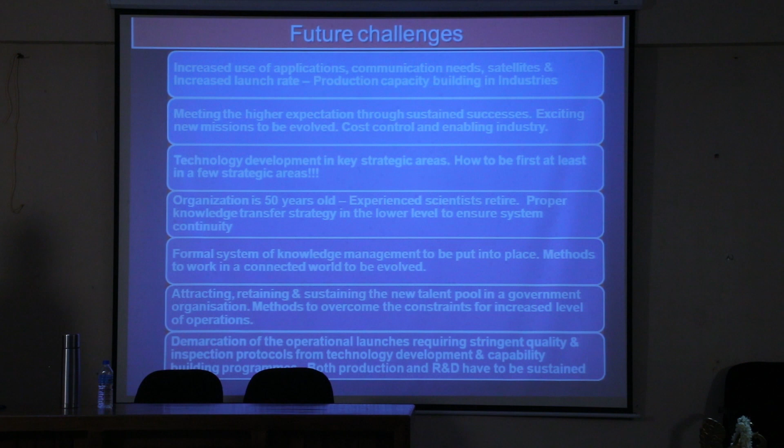Once a retired person goes, we normally don't like him, no? That he has escaped from here and so it is my time now. We don't have a culture like that. We mutually respect our seniors and we work together to keep our knowledge and skill intact. Because they have such knowledge over the years and we need to understand how it can be utilized. So this is why I put the credit. Thank you.